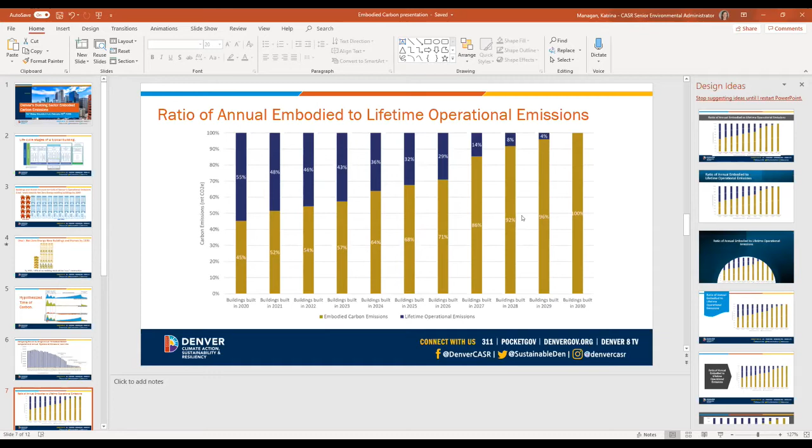So with that, I'll jump in and share my screen. Okay, go full screen. All over there. Okay, it didn't start at the beginning. All right, let's see, I clicked on the first one. We don't want to start in the middle. Okay, that is good, I can actually see a few of you. I can't see the chat currently, so feel free to chime in if you have questions. I'd like to make this really interactive. I can see just a handful of your faces.

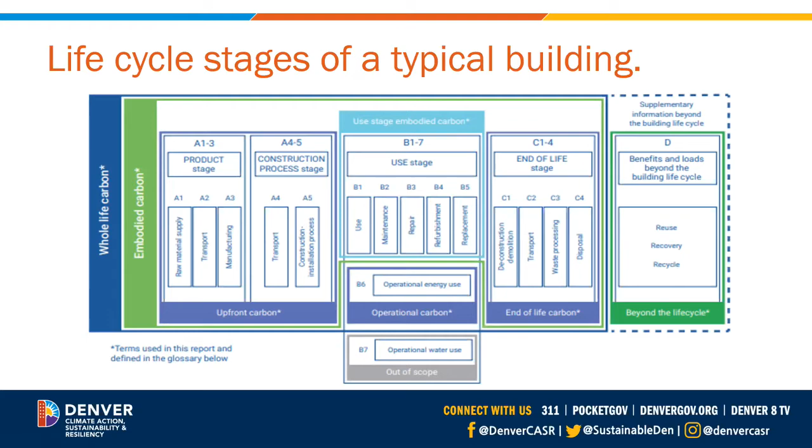And then there's operational carbon, which is of course part of whole life carbon, that's usually what we've looked at. So what has our team been most focused on? It's been operational energy use. I'll actually just start there because this is really familiar content for me.

Buildings and homes account for 64% of Denver's operational emissions, and transportation is the next chunk, with a few other things making up little pieces. A lot of this is also called production emissions, right? This is all the emissions from the electricity and natural gas used in buildings.

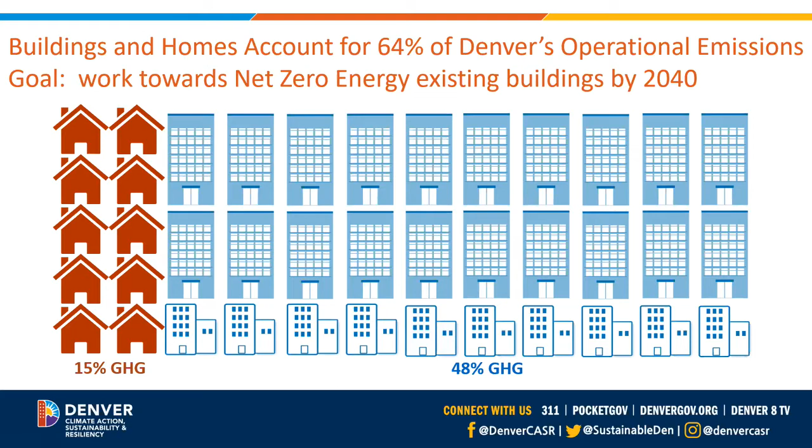This should actually be 49% for buildings and 15% for homes - I had this off by one. That's for our 2019 inventory. New buildings are really important because by 2050, 40% of our building stock will be new.

That's where it's really relevant to talk about embodied carbon, it's where we can do something about it. We have a goal for all new buildings to be net zero energy, but again, we're talking about net zero operations when we set that goal by 2030.

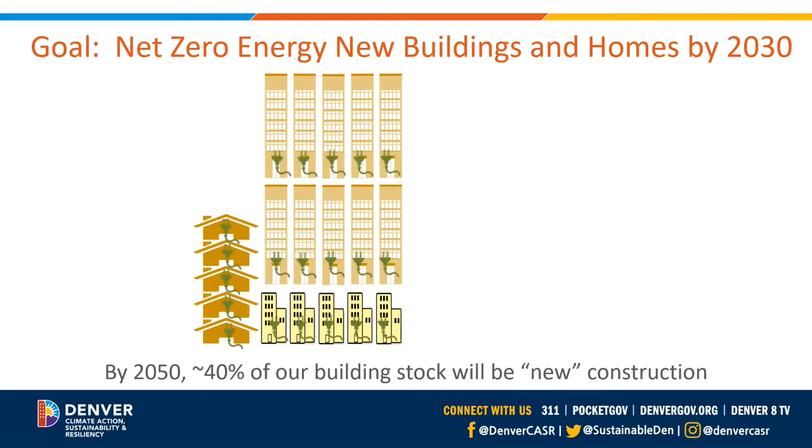Amber recently wrote a whole plan on how we're going to take buildings to net zero energy by 2030, but it's all operational energy. So I thought I'd show this other helpful framing graphic for how we're thinking about this issue of embodied carbon. On the top line is where we are now.

We might be slightly better because our commercial code is 15% better than the national 2018 IECC, but you can see the carbon - there's a bunch from raw material extraction, manufacturing, construction, then all the operations of the building, and the end of life and demolition. As we go towards our net zero energy goal, you can see in green, that operations part drops down.

This graphic also included net positive. It's not a goal of ours at this time, but if we could get to net zero - the green line - that would be pretty amazing. We're going to get there by 2030, or we've written a plan for how to do that. And then all the carbon becomes the embodied carbon when you're looking at emissions from these new buildings.

So the questions we asked in our embodied carbon inventory were designed to inform our work. Things like: how much carbon in any given year is from embodied carbon versus operational carbon? Where should our work be focused? And when we're talking about new buildings and code updates, for any new building, what portion of the lifetime emissions - you're baking in emissions when you build a building - what portion are embodied carbon versus operational carbon?

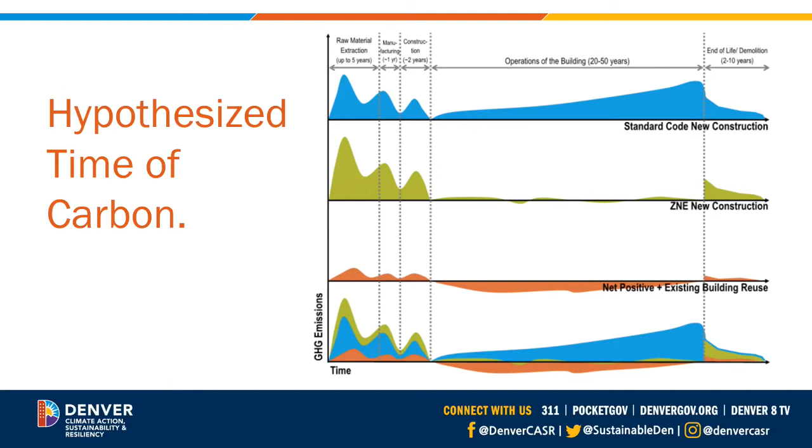So that's some of the slides I'll show you. This is what we found in our first inventory of embodied carbon. Looking over time, if you look at annual embodied carbon emissions in any one given year from buildings compared to all annual operational emissions over time, the embodied carbon has been pretty constant.

It is significant - Denver grows by about 2% every year, that's how we're getting to 40% of our building stock being new by 2050. But if you look at 2019, our latest greenhouse gas inventory, we've got a little less than 6 million metric tons of carbon dioxide total, and only a little less than 500,000 of that is embodied carbon.

So this made me feel relatively good that most of our work to date has focused on those operational emissions - embodied carbon is smaller. But as we go forward, you can see our goals: by 2024, new homes are all electric; by 2027, new buildings are all electric; by 2030, all of our electricity is 100% renewable. So those operational emissions start going down.

We have a goal that all buildings and homes, not just the new ones, by 2040 are net zero energy. This chart shows all electric, but they're going to be more efficient, powered by 100% renewable electricity, and all electric. So by 2040, if we hit that goal, all of our emissions are the embodied carbon — that's what's left for building emissions. We've got to start thinking about how to get that carbon out too, assuming we're successful in all these other really ambitious goals.

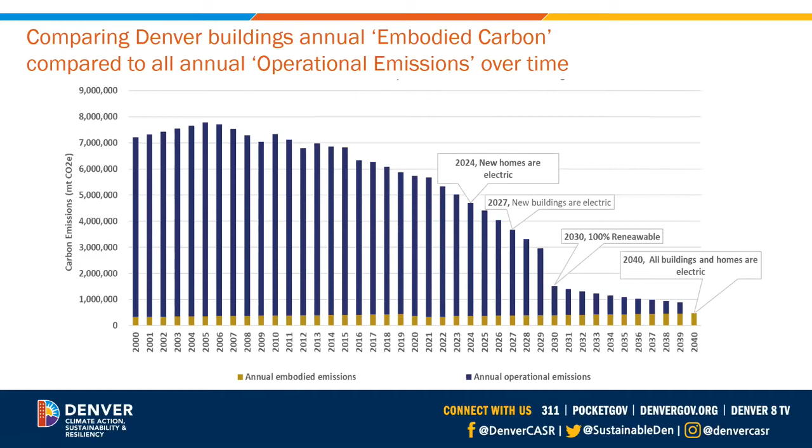The next thing we looked at is that ratio for buildings built in any given year, assuming we implement our net zero implementation plan, what portion of the lifetime emissions — I think it's actually lifetime embodied versus lifetime operational emissions for a building. The closer we get to a net zero energy building, and by 2030 we'll have net zero energy new buildings that operate as designed, all electric, highly efficient, powered by 100% renewable electricity — well, then embodied carbon becomes the biggest part of their lifetime emissions. It becomes the problem we really need to solve for. This starts to put things in scale in terms of where our effort should be and what the opportunity is if we started to tackle embodied carbon.

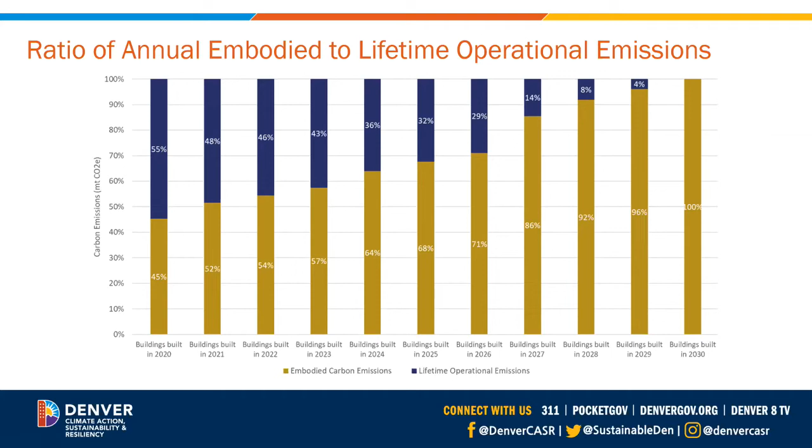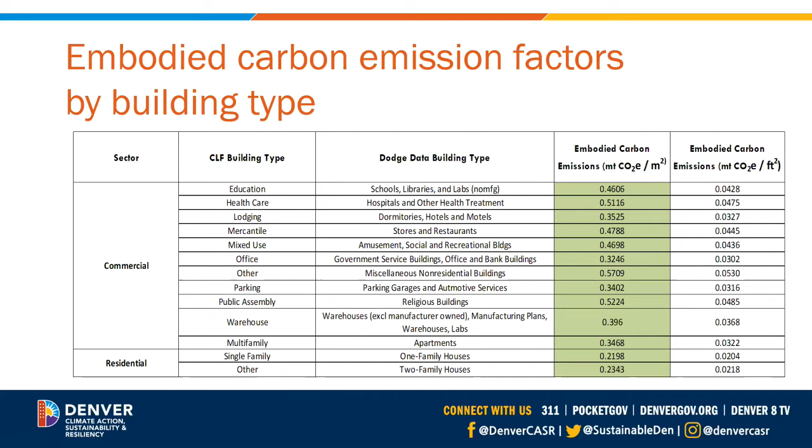Next, the embodied carbon inventory looked at what is the embodied carbon by building type. You can see a bunch of different commercial building types and the emissions in the green area showing carbon dioxide per meter squared or per square foot. We'll stick with the green one. It's interesting because residential, at a quick glance, is clearly a lot less carbon intensive — there's less embodied carbon. These are all the big building types getting built the most in Denver right now. In particular, there's a lot of multifamily getting built in Denver, and then some office and single family. So again, where should we be focusing? This starts to tell us something about which building types are the most carbon intensive.

We looked at what are some of those hot spots, the sources of embodied carbon. This group may know this a lot better than us if you're looking at it closely, but the typical hotspots are in the structure — beams, columns, floors and roofs — and the finishes, and then in the envelope, things like panels, glass, and insulation.

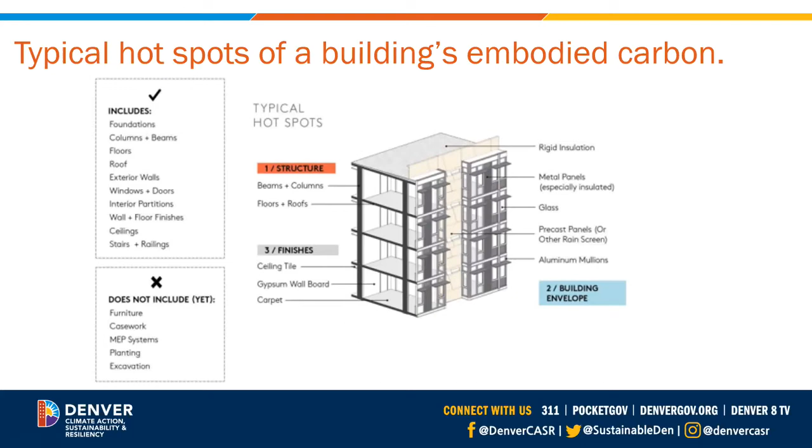So we started to look a little bit at what the opportunity is to reduce embodied carbon for some of these different materials. What's the standard embodied carbon estimate for different materials, what's the low carbon estimate, and how much does that save if you moved to low carbon options on some of these materials? It adds up to be pretty significant — we're finding that you can get something like a 60% reduction in embodied carbon by moving to lower carbon materials.

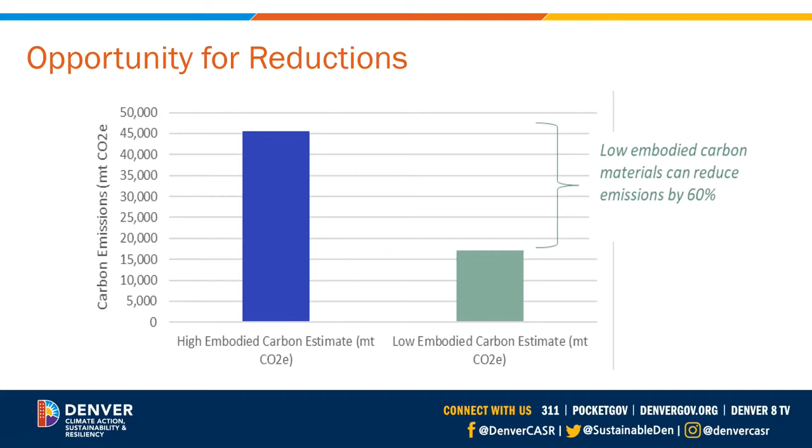What we haven't studied yet is how readily available those materials are, and how much they cost. This is our first brush at it — I think there's something here that we should start looking at more closely, because it's going to become a bigger part of our emissions portfolio as we move all the new and existing buildings towards net zero energy in their operations. With that, I can take any questions — we can pause and see if there are questions on our inventory.